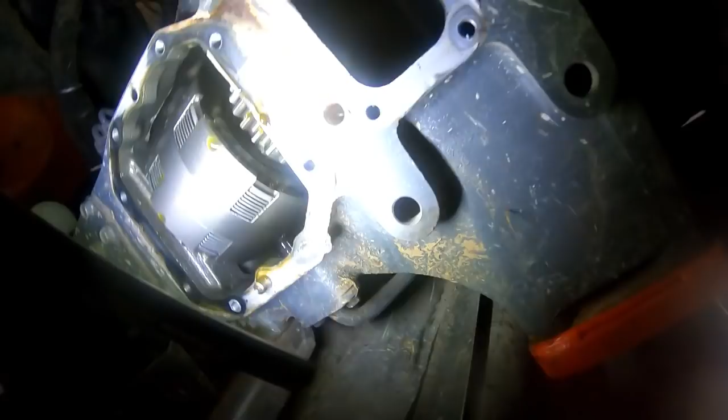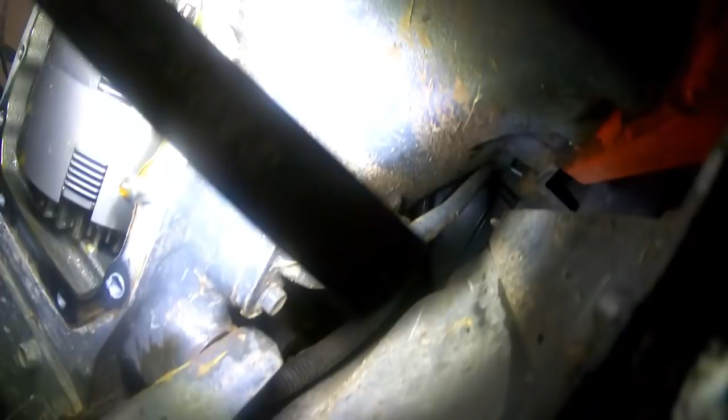Okay, what do we have here? We need to get the light over here. This pack looks to be burnt. Okay, let's see, this.

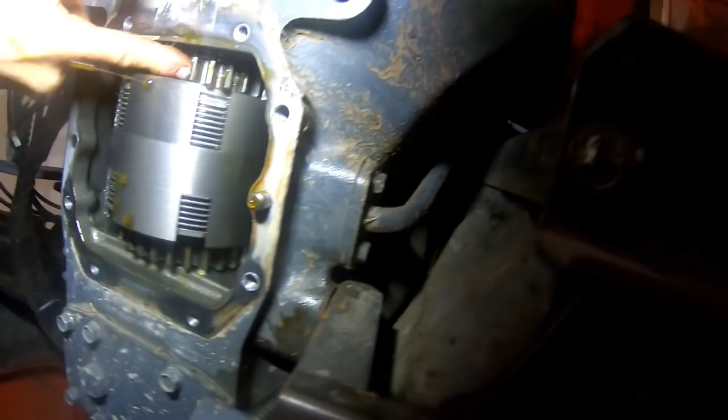See how this one's turning in here? I'm gonna have to look at the book. See how this works, is one side spring loaded and it's fooling me? This side is locked up.

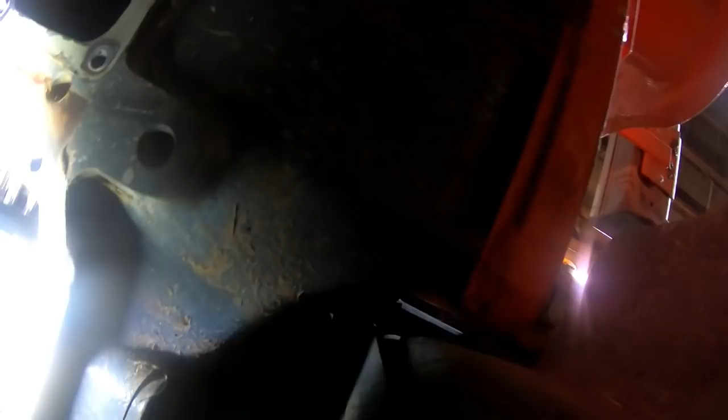I gotta look and see, make sure I'm thinking right here. I was looking for a Belleville spring or something in there that would lead me to believe that that was a spring-loaded brake. Right now it's appearing as if this one's locked up all the time. And how does that actually work?

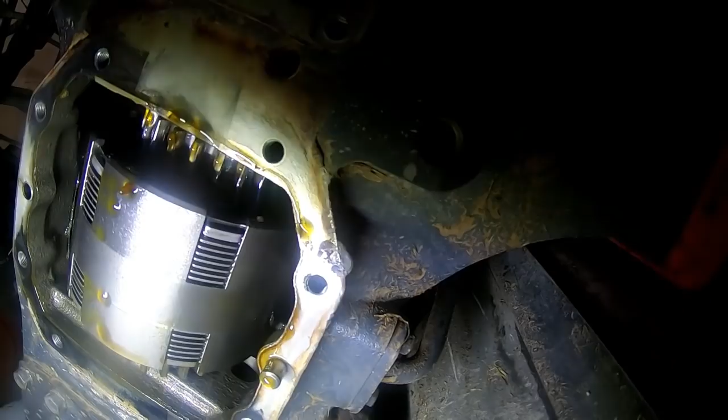That would turn the whole shaft. Let me look in the book and do a little more research on this before I make a decision here. I need to find out what's in these two packs. Is one side spring applied and the other side pressure applied? I'm not sure yet.

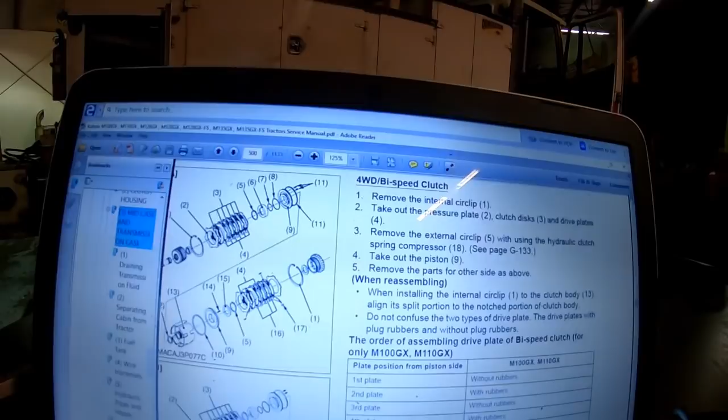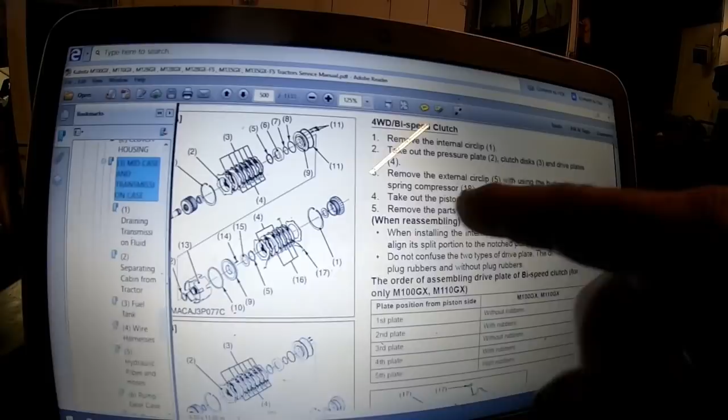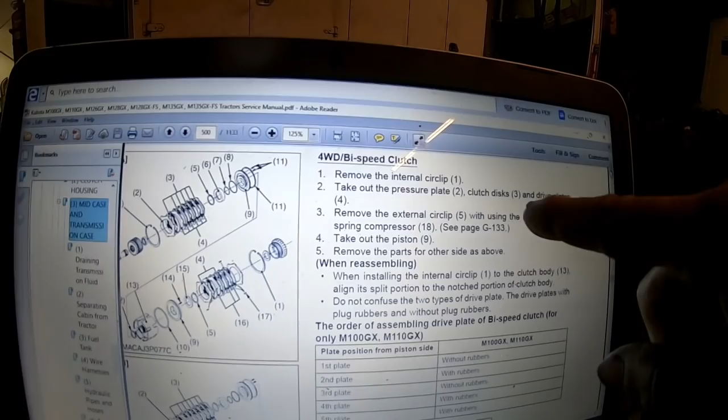Any spring-loaded clutch pack I've ever worked on, most of the time the clutch piston will actually release the clutch pack, and the bevel springs, usually you can't pull where your frictions and seals are without compressing that. They're calling it a circlip. You don't just say remove internal circlip 1, take out the pressure plate 2, clutch disc 3, and drive plates 4, remove the external circlip 5, which is going to be the spring.

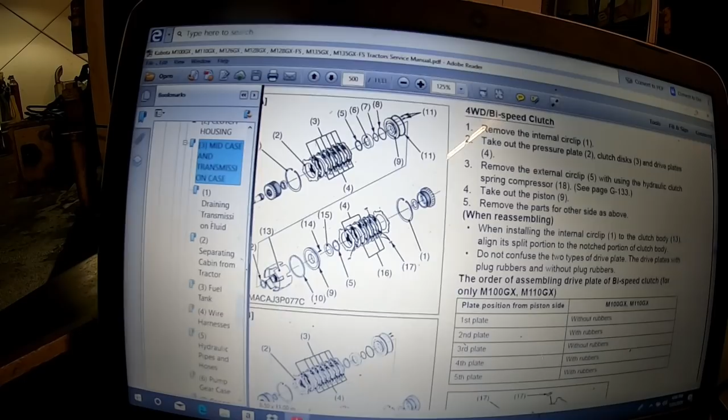6 is going to be, what are they saying 6 is? Take out the piston, 9. Where's the spring at? Must be number 6, I'm guessing. Or the spring retainer, they're not really saying though. What the hell's number 6? Why would you list all that? Okay, number 6, collar. Where's the damn spring at?

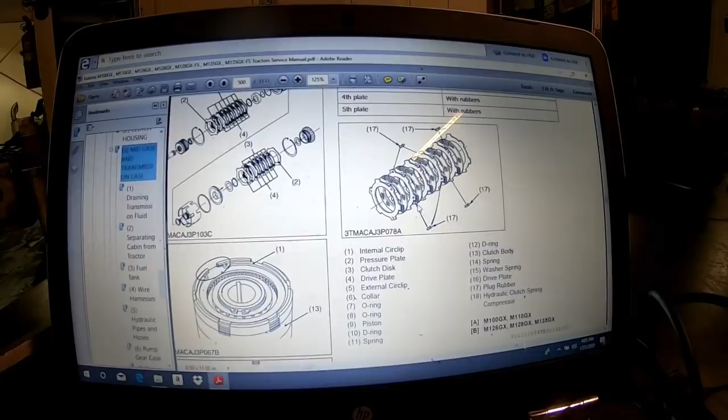O-ring, D-ring, spring, where's... well, I'm wrong. Wait a second, no, that's... where's 11 at, where's 11? 17, what are 17? Yeah, I remember that on that one I rebuilt, had all these rubber plugs in the steel plates. Goofier than hell.

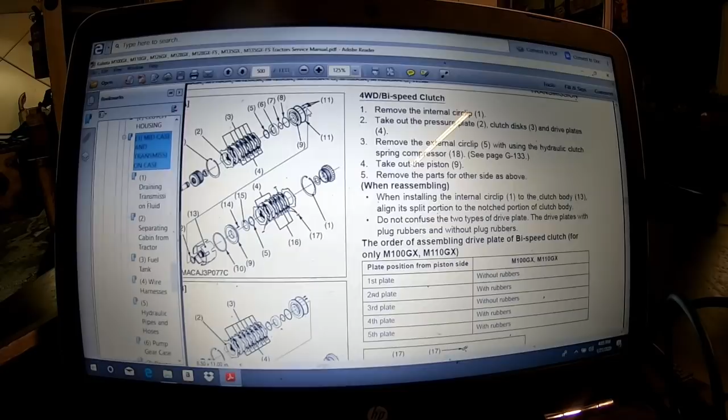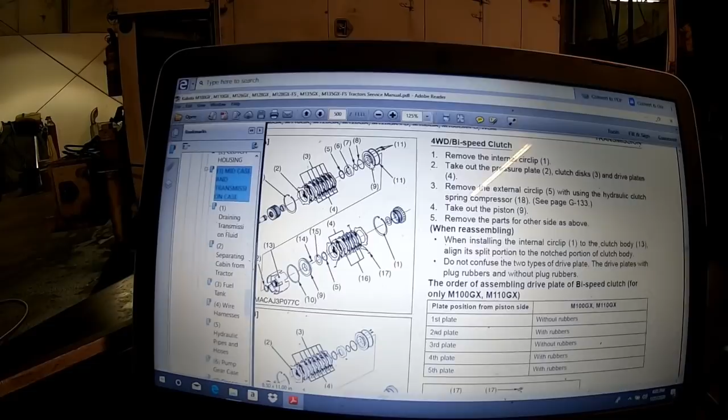I'm looking for number 11. Right behind 9. Okay, spring. So they're underneath that clutch piston. So I'm trying to think this through here. So you'd have to compress those. Okay, so all that's doing is releasing the clutch piston when there's no oil on it. Just a little bit different way of doing it than I'm used to.

Yeah. That's goofier than hell, anyway. Alright guys, so the book on this is not very good, but I understand it now. The four-wheel drive side is spring applied.

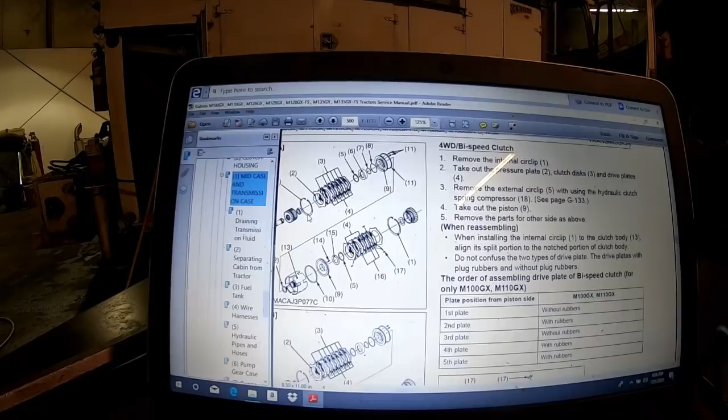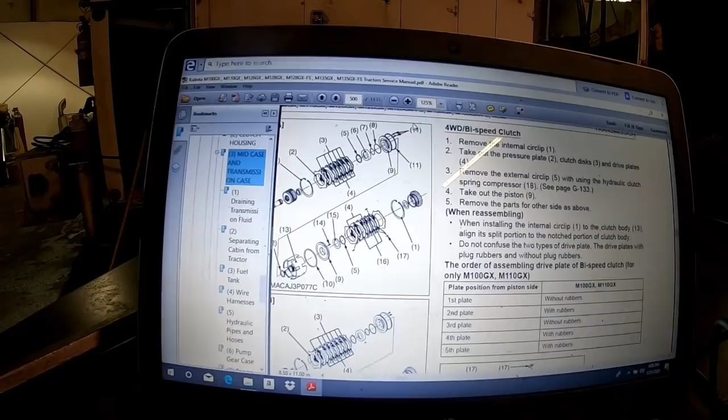Those little springs are, I remember this now, pulling this clutch pack apart years ago. Those springs are under the piston, shoving it up, keeping the clutch pack together. So it takes oil to shove the piston down against the springs to release the clutch pack. The other end, the bi-speed clutch pack, is exactly the opposite. Those little springs are on top of the piston, forcing the piston down. And then it takes oil pressure to overcome spring pressure and shove the piston against all the frictions and steels.

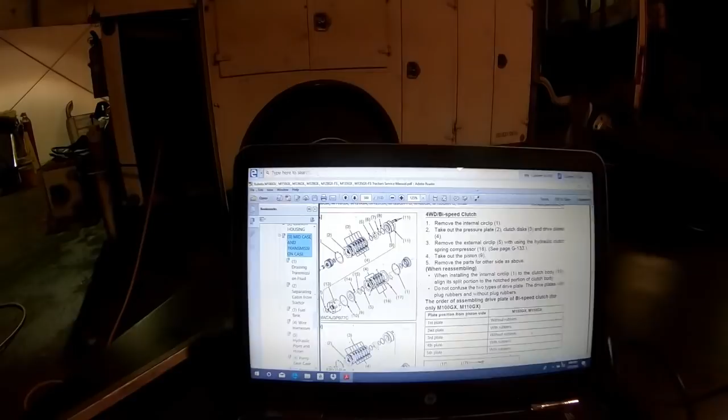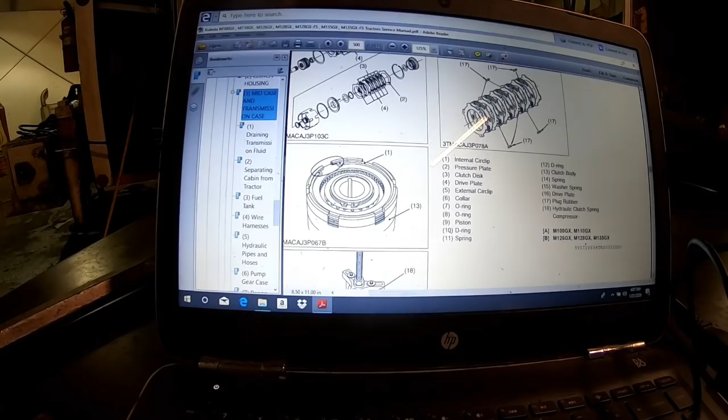So the book is pretty vague in the way they're explaining things. They're telling you to just pull that snap ring out of there, and then you read the assembly instructions and they don't say anything about compressing all that stuff back in there to make it go back together. So it's kind of a piss poor book, and this is the book for the M135GX, and it's the same exact transmission as the M126GX as far as I can tell, because I've got that book as well. But that's what it is, it's a spring-loaded clutch pack.

What did I do with the stick light? Did I bring it back out here, or did I leave it over here?

I got it, Blake. I'm kind of curious about this whole thing. I don't want to make a mistake of tearing this whole tractor down and that not being the problem.

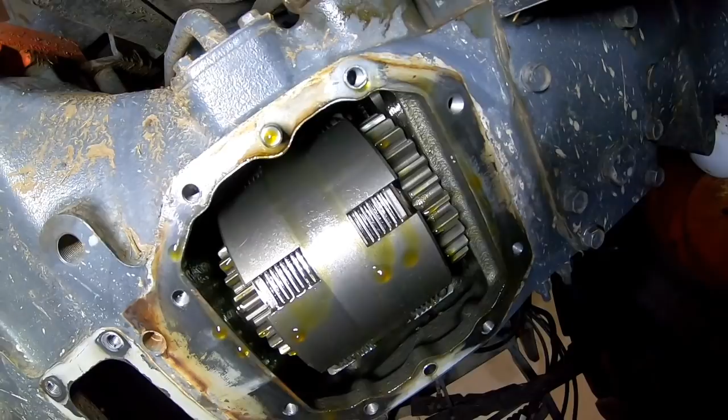I'll tell you what I'm seeing here, guys. There's two clutch packs on this. One's the bi-speed, one's the four-wheel drive. I'm not even really sure what that bi-speed does, to be honest with you. But here, one pack is turning in there.

So what I'm doing here, that gear I'm turning, I figured out is the bi-speed clutch. I think the bi-speed clutch is pressure applied, and when that bi-speed clutch is engaged, it has to disengage the front clutch pack. Then what happens is it transfers the power through that set of gears to that front gear that turns this prop shaft going to the front diff.

So I had to do a little research on this bi-speed thing. I was trying to figure out what the hell is bi-speed. Kubota's idea on this, say if you're in dirt - which I've never had any problem with on any other tractor. Now on pavement or hard ground, you always turn your four-wheel drive off anyway, so the front end doesn't hop and all that stuff.

But Kubota's idea and theory behind this was that when you're turning and you want a smooth turn - say you're doing a sharp 180-degree turn to go the other way, and you're disking or harrowing - that bi-speed clutch is supposed to engage, go through that set of gears I pulled off the bottom, and turn that front shaft twice as fast as the rear tires. So the front end's supposed to turn twice as fast, and they say that's supposed to make a smoother turn. I guess, I've never been in one to see what it does.

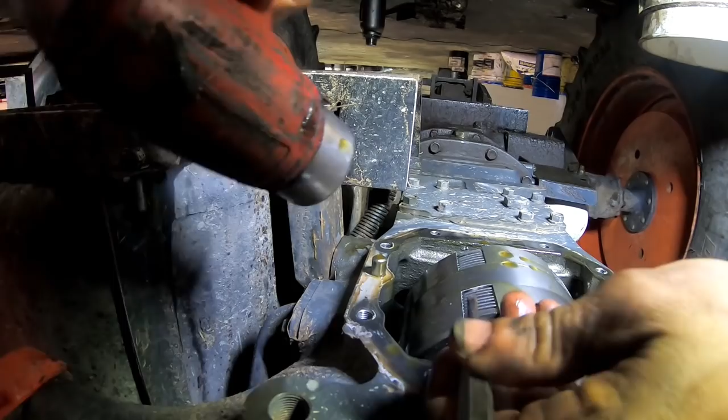I mean, I've obviously stirred the pot up when I started talking bad about Kubota. I had some guys say, I own 9 Kubotas and I've run them for 20 years, and that's good for you. Anyway, but you know, I guess you can tell me whether it works or not.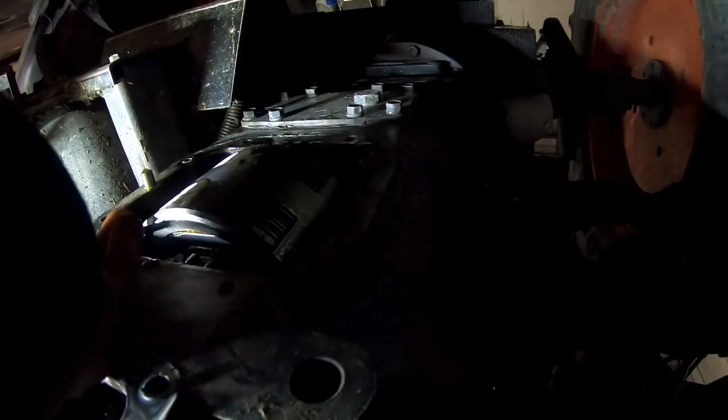But I do remember years ago on a 126X, he lost the shuttle pack at like 2,500 hours on that tractor. I split it, replaced the forward and reverse clutch pack pistons and seals, and then at like 4,500 hours we ended up splitting it again because he didn't want to do the whole transmission the first time. Then he lost the 1 through 4 on the high-low pack, and right after that they lost the engine on it at like 5,000 hours. Kubota actually warranted the engine even though they didn't have to, and then he got rid of it.

And one of these tractors here that I'm working on, there's two of these 135s. It only had 2,600 hours on one of these, and they lost an engine, and Kubota warranted it. So I can't say Kubota wasn't standing behind their engines when they really didn't have to. But these guys that run them for 20 years, yeah, maybe they aren't taken very good care of. But a lot of the John Deeres they've got aren't taken good care of either, and they last longer than 2,500 hours, I can tell you that, the engines do. And they're taken care of just the same way. So, anyway, that's my little rant about that.

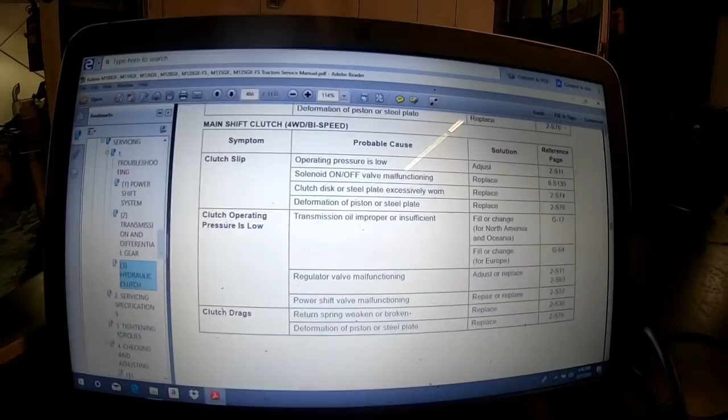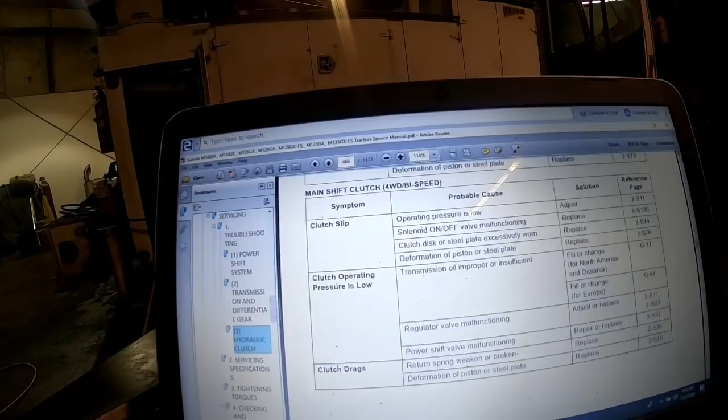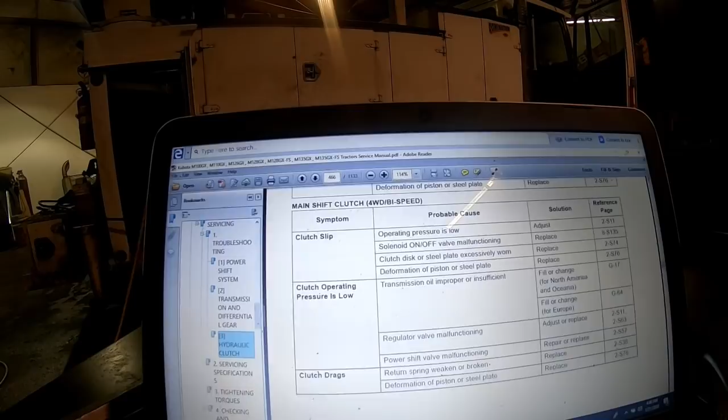I've been doing some research. I called the dealer up in town, and I don't know - the way he's saying it's a spring-loaded clutch pack, but everything I'm reading in the service manual, like right here's the troubleshooting: main shift clutch, four-wheel drive, bi-speed - clutch slip, operating pressure is low. So if it was a spring-loaded clutch pack, it wouldn't matter if the pressure was low. If you had a broken spring, it would slip, because the operating pressure is what releases it.

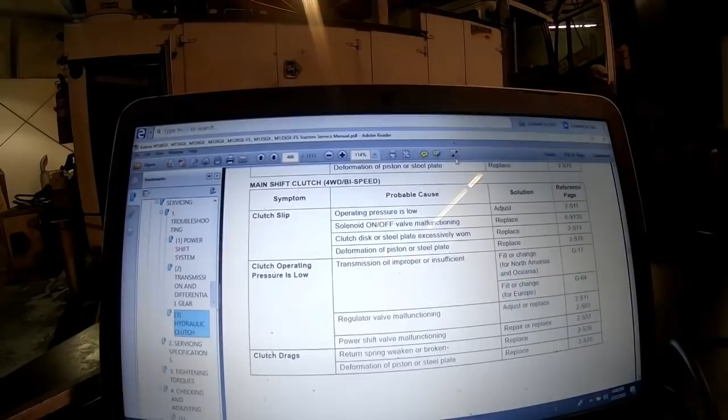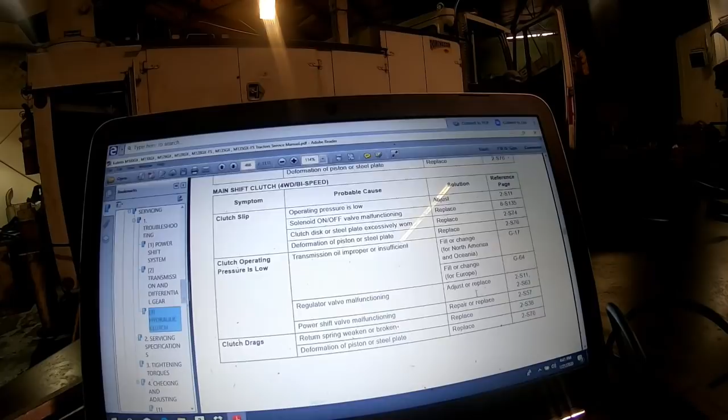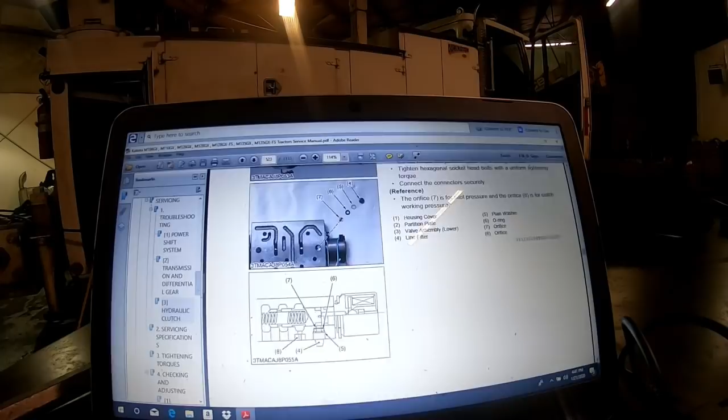So you can go back up to here, if I can find it. Yeah, where was it at? Deformation, clutch operating pressure is low. So you can go up here and it'll tell you, I think it's here maybe. Separating, disconnecting wiring harness - that's not what I wanted to do. It tells you about testing that. Somewhere in here. I don't know where, but it tells you about it in there somewhere. Where's it at here?

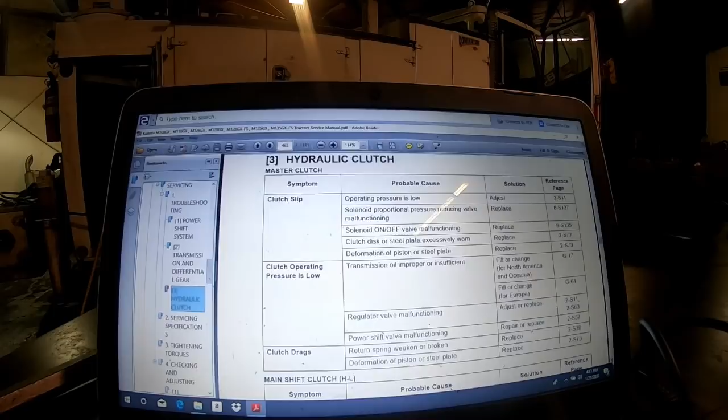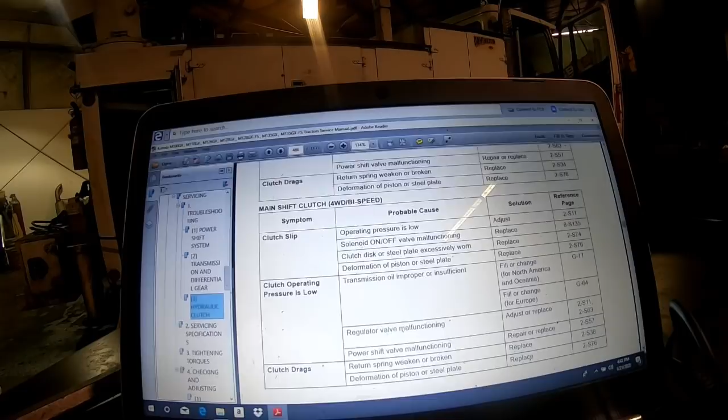Fill or change, adjust or replace - that's for the regulator valve. There was a spot in here, I gotta find it. Checking and adjusting. Maybe that was hydraulic clutch power shift - yeah, that's what I was doing.

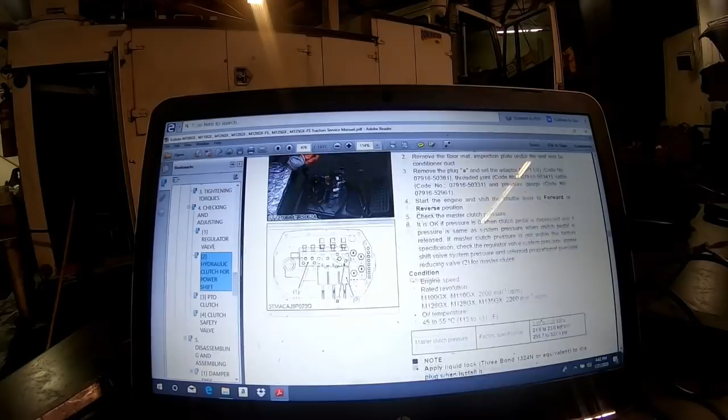So if you go in here to the testing, you can pull that valve plate off. I'll go down here to bi-speed full drive. This guy up here is telling me it's a spring-loaded clutch pack, and that's not what I'm getting out of the book and the way it works.

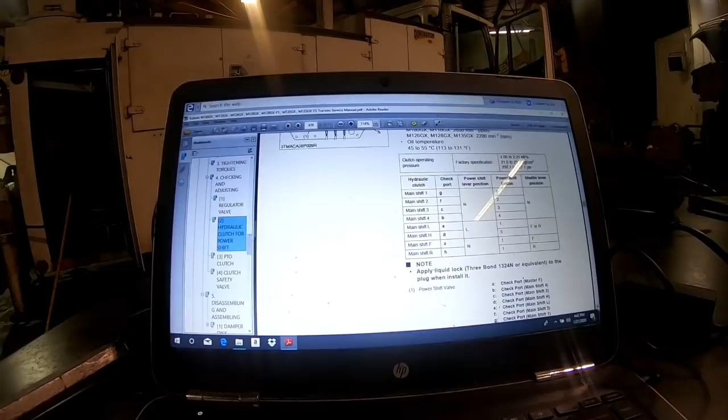Because you turn the full drive switch on and it comes up to system pressure. You turn the full drive switch off, and the indicator light goes off on the dash, then it goes to zero pressure. So that tells me it's pressure applied.

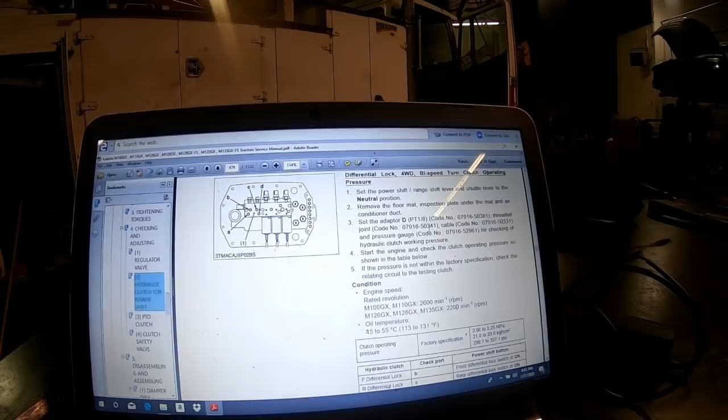Differential lock, full drive, bi-speed turn clutch operating pressure. Set the power shift, range shift lever, and shuttle lever to neutral position - we did that. Remove the floor mat and set the adapter, whatever you're supposed to put in there. We were on this one over here - test port A is where we were at.

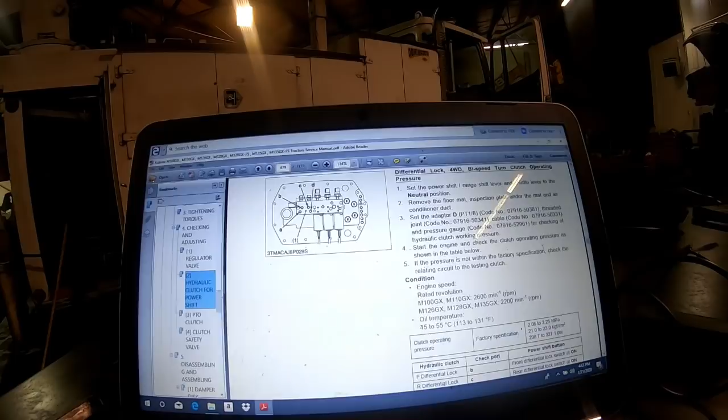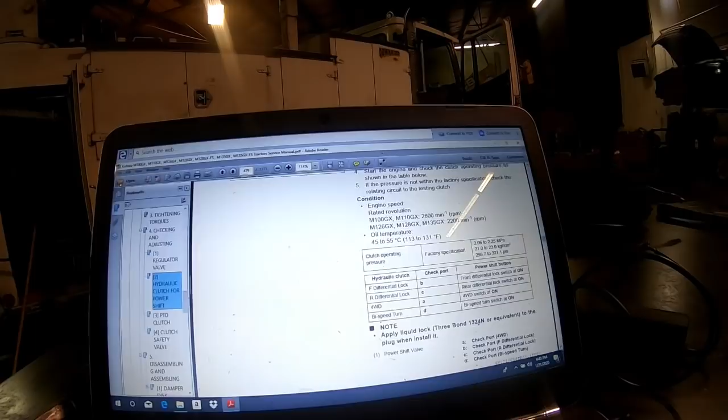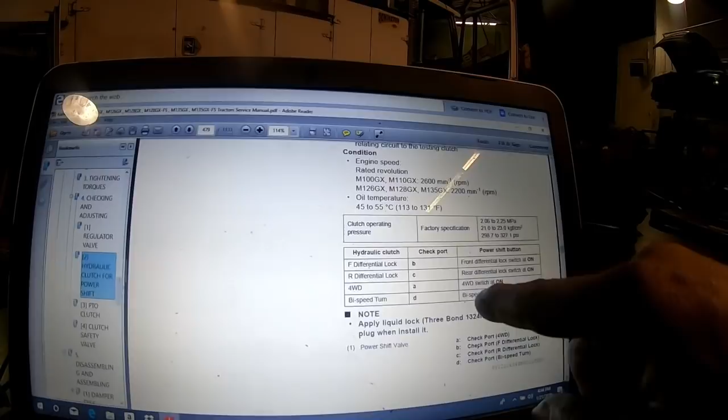Hydraulic clutch - it tells you that diff lock is for port B. We were on port A. Four-wheel drive, check port A, four-wheel drive switch at on position. That tells you it's a pressure applied clutch.

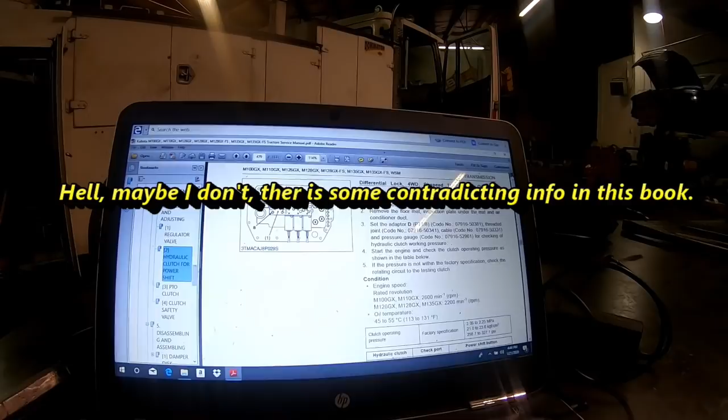I'm sorry, but I don't think he knows what in the hell he's talking about. Yeah, that's what I'm getting out of that whole thing right there. So I might do a little more research tonight. I don't want to pull that whole thing apart and find I don't have anything wrong there, but everything's pointing to that one clutch pack.

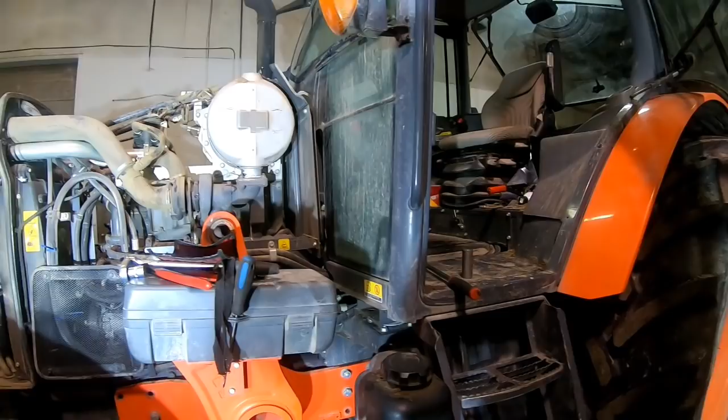Because you put it in two-wheel drive and you can't stop the drive line, and then of course he asked did your guy in the cab have his foot on the brake? Because it's got dynamic braking, and he's right about that - it turns the four-wheel drive on when you put on the brake pedal. But no, because I remember being underneath the tractor trying to stop the drive line, and the back tire was turning.

If he had his foot on the brake, the tire wouldn't have been turning. So I asked him, and he said he didn't have his foot on the brake. That would defeat the whole purpose of putting your foot on the brake - it would defeat the whole purpose of the test, getting the drive line to see if the wheels would turn.

So I don't know, I've got a feeling we're going to be tearing this thing completely down, but I just don't want to make a mistake of doing it and not finding the absolute problem.

So anyway, it's about 5 o'clock, we're going to put stuff up. We got all the 8.3 Cummins parts in the back of the service truck - we're going to take them home and rebuild it in the nice warm shop. In my 6-liter Ford, I've got two 6-liters, an '06 King Ranch, and that old service truck that I need to get my button gear fixed. Hell, Blake could drive that.

My King Ranch - the damn wife called, she says it's billowing white smoke out of it everywhere. And I said, oh, the EGR cooler went out on it. I can tell you what's wrong with it.

So anyways, maybe one of you Kubota guys there - I've been through a couple of these, not near as many as the green ones. These three tractors, these guys got a 126GX and two 135GXs, and these are starting to get a few hours on them, and these guys are pretty rough on stuff, so I'm probably going to be seeing them quite a bit. So I need to bone up on them.